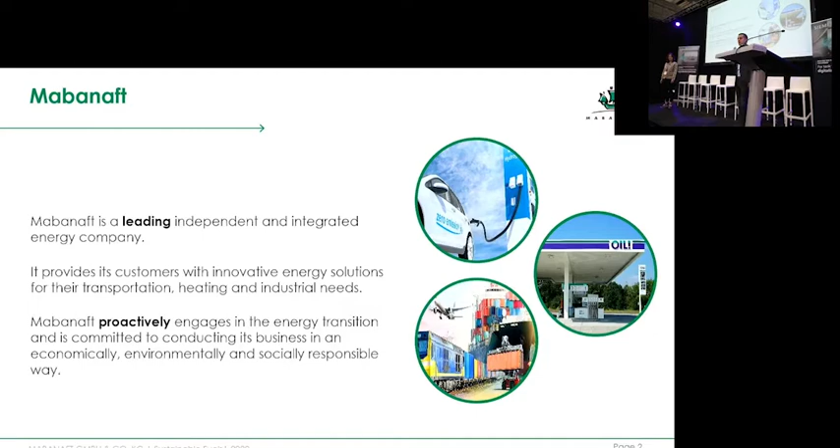Maybe to say a few words about Mabanaft for those who don't know us. We are also part of Marquard and Bahls Group and a leading independent integrated energy company. Our main business is providing energy solutions to our customers. So we are an energy supplier as we see ourselves, currently mostly liquid energy, but in future it of course can change. And we also decided that we want to proactively engage in the energy transition and to contribute to this and help our customers to move to a cleaner new world faster.

A few numbers: we are around about 1,000 employees, over 600 service stations, mostly in Northwest Europe, 18 million tons of sale volumes. And as you can see, our logo is green. It has always been green, even before it became popular. And now, of course, we need to also adjust our business to fit this nice green color. But I think we are on a good way to do so.

One of our areas of activities is called New Energy, Chemicals and Gas. Here we focus a lot on sustainable fuels. I will explain it a little bit more in a second, but also chemicals is part of our portfolio. We are constructing one of the largest ammonia plants in the United States right now, where Oiltanking slash Advario is also part of this project and is building the largest ammonia tank there to store this product. And finally, gas is also part of this new energy business where we trade LPG and bring it to our customers.

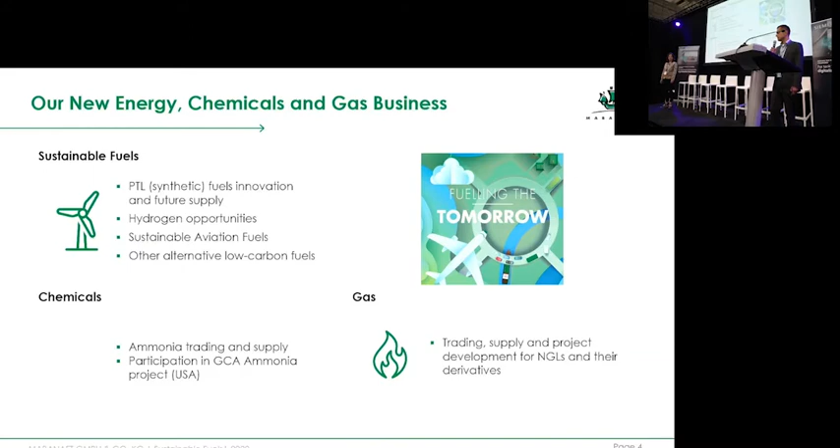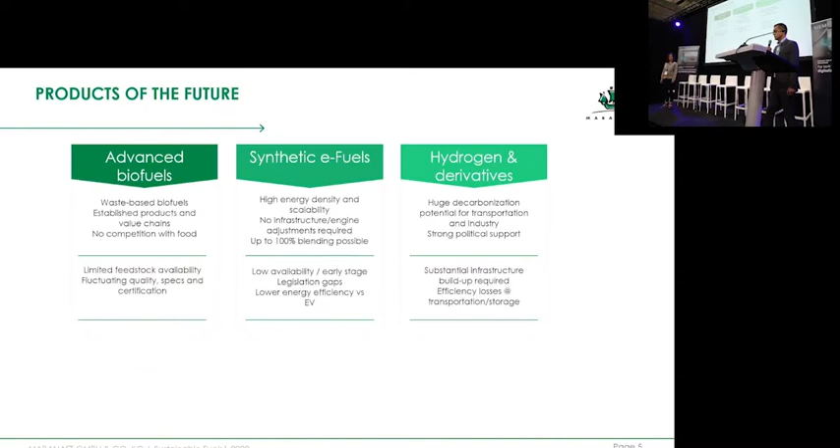So as we see, the future is not only about hydrogen. Of course, hydrogen will have a huge impact on energy transition and will be a key for the long-term energy transition. But apart from hydrogen, we also see a lot of future and potential for liquid products as well. And that is good news because the entire infrastructure we all have now can be used in future as well for advanced biofuels, waste-based biofuels basically, and synthetic fuels produced or derived from hydrogen.

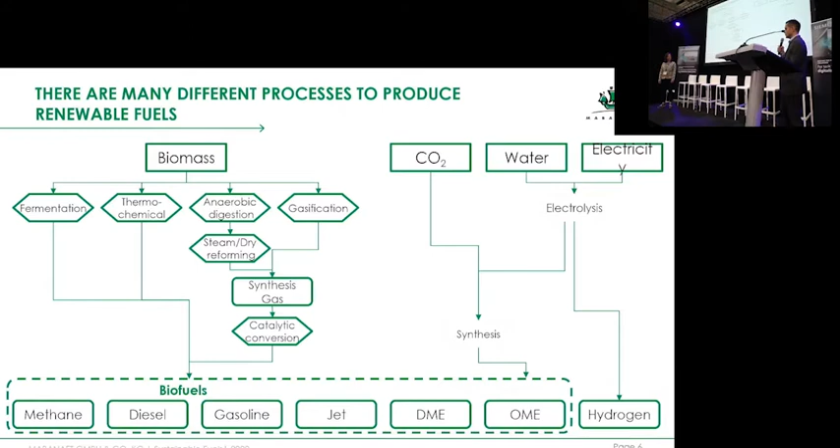You can get to the same products we have today from fossil fuels through different pathways. You can use biomass and ideally waste biomass to get to diesel, jet fuel, gasoline, whatever you require, even feedstocks for the chemical industry. But you can also produce your hydrogen through an electrolysis process and then either use hydrogen directly or go to the synthesis process where you combine hydrogen with CO2 and in this way also get to these liquid or gaseous products. So more or less the same molecules but produced in a green way.

We focus a lot now on e-fuels, the synthetic fuels, because we see these huge advantages of these products. They have more or less the same chemical composition as the products we already now use and know. The entire import or handling infrastructure can be used without any adjustments or changes. Also, our customers don't need to change anything on their cars or engines. They can just use synthetic fuels instead of fossil ones.

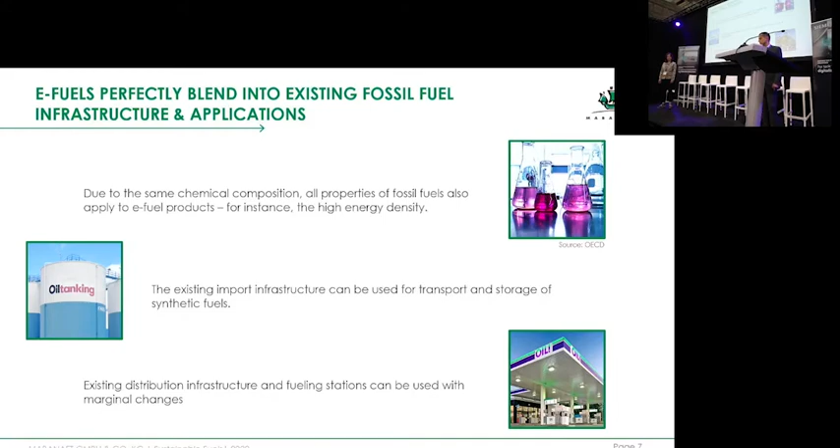And of course, they have a very high energy density. It's a liquid material. You can transport it better. You can store it more efficiently. And of course, you can bring it all the way to their customers and consumers, at the service stations, without any modifications required.

For that, we have different projects and initiatives. One of the largest initiatives is our joint venture P2X Europe with our partner, another German company, Hansen and Rosenthal. And one of the key areas of activities is development of our own synthetic fuels production. We are now planning a plant in Iberia to produce synthetic jet.

But first of all, we are, as we speak, taking into operation a small demonstration plant in Hamburg. It will be producing synthetic diesel, hopefully in the next weeks already. And we hope to bring this product to the market this year. And the purpose of this small project is to demonstrate that the production and utilization of these synthetic fuels is absolutely realistic and possible.

Our partner already operates a green electrolyzer in Hamburg for the last 3-4 years. It's around 5 megawatt of electrolyzer capacity, and now we're adding a small synthetic plant to that to combine green hydrogen with CO2 from biogenic source and produce synthetic products such as diesel, naphtha, and waxes. So yeah, we hope to showcase e-fuels very, very soon, as probably the first mover in Germany at least, maybe in Europe, being able to offer it in the market basically in a commercial way.

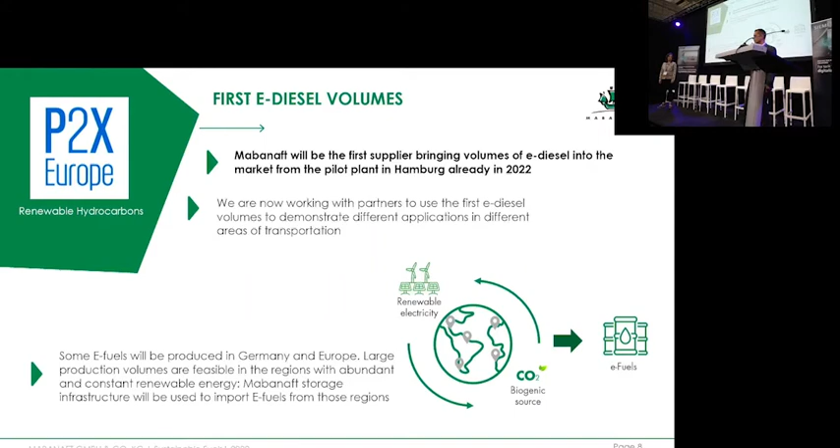A very small volume, of course, but still it's important because we still lack a lot of legislation, we still lack a lot of clarity around how these products will be handled, how they will be, for instance, applied to the CO2 obligations we have as a marketer of fuels in Germany. So we hope to push a little bit the politicians to create this clarity finally.

Well, moving on to hydrogen, we also see a lot of potential, of course, and this is a bit farther away from our current capabilities, but we believe that Mabanaft is also very well positioned to play a role here. And we all know that there is a huge potential for hydrogen. There are different forecasts, as we have seen today and during the first day of this event. And there will be importers and exporters. So, of course, there are regions where hydrogen, or particularly green hydrogen, can be produced in a more efficient way. Here, I just listed a few examples.

Also, there will be regions where production of green hydrogen is not so efficient. I think in Northern Europe, particularly in Germany, or let's say Scandinavia, maybe is a bit different story, but here in the Netherlands or in Germany, it is more efficient, of course, to use green energy produced here directly. But the green energy demand will be so huge that you will also need to import it from the regions where you can make it more efficiently, and maybe where otherwise this potential for green energy will be underutilized. And this can be done in form of hydrogen or e-fuels or other materials, but one way or another it will need to be imported, and then the corresponding infrastructure will be required.

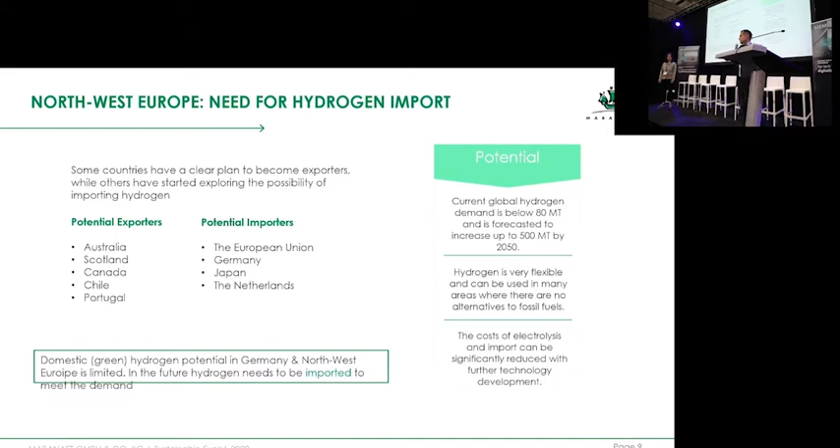How exactly you do this, how you transport hydrogen? The answer is simple. It depends, right? It depends. We are doing now a study with Technical University of Hamburg. We are taking part in different hydrogen initiatives, and everyone is looking into this, of course. And what we find out, I think, is that different ways and modes of transportation will be required and will be used, and it will depend a lot on how far you need to transport hydrogen. It will depend a lot on what is the final requirement. Do you want to use it as a liquid hydrogen, as a gaseous hydrogen? Do you want to use it as ammonia or methanol? The entire value chain needs to be analyzed, and then the decision has to be taken.

I will show you a little bit more detailed comparison of these different ways to transport hydrogen in a bit. But I think over long distance you will use, of course, pipelines or ships, and on a shorter distance, distributed locally, you will need some trucks or maybe railway to transport it, but it's of course much less efficient and will mean more losses during the transportation. But I think this is the main challenge all of us are facing now, to understand this better.

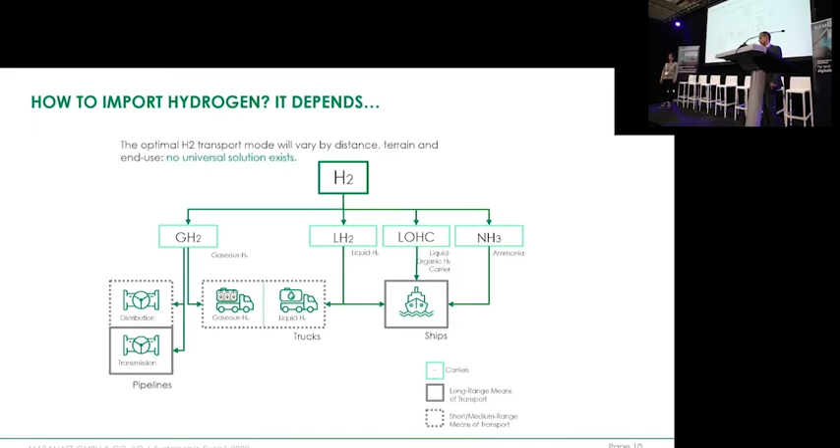Before I show a short comparison of all these different methods to store and transport hydrogen, just a few words on what Mabanaft is doing. We are a founding member of Aquaventus. It's a large initiative in Germany to install 10 gigawatts of wind energy offshore and to produce hydrogen also offshore on the platforms. I think it's still a nice idea with a lot of large companies involved, but it's rather a long-term development. Then we are also taking part in H2Dezentral. It's an initiative of the German Energy Agency looking into decentralized utilization of hydrogen.

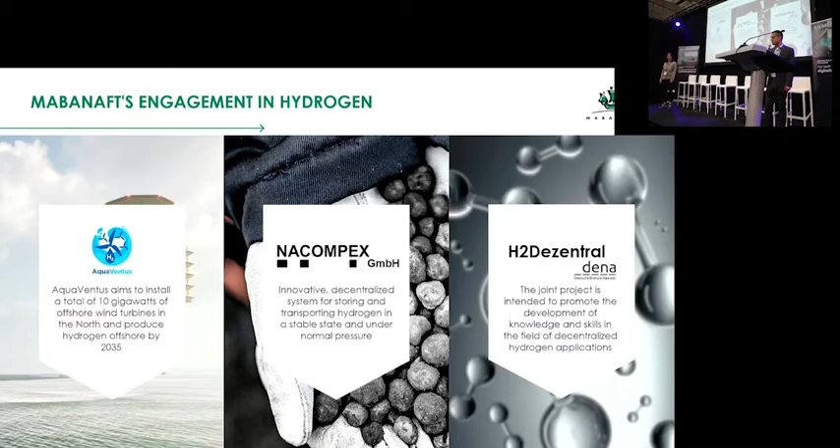And we also have some interesting local projects all around Germany looking into different opportunities to maybe locally produce or store and use hydrogen. And finally, and this is why Claudia Hain is also here, Nacompex, it's our investment where a new hydrogen storage technology, or not so new actually, but Claudia will explain, an interesting option to store and transport hydrogen is being developed.

And before I hand over to Claudia, maybe a few words on different options to store hydrogen. Of course, you've heard about all of them, and as you see, all of them have a lot of pros, but even more cons. So you will need to compare very carefully what is the best option for you, but I believe that all of them will be used because there are so many applications. Hydrogen is so flexible in its utilization that all these forms will be used one way or another.

So just to run very briefly through them, gaseous hydrogen is of course very pure and the mainly required product. You don't need a lot of energy for compression as in case of other materials, but on the other hand, it's a very low volumetric energy density and transportation over long distances has not been tested much yet, and a lot of investment for construction of this infrastructure will be required.

Liquid hydrogen has, on the contrary, very high volumetric density, but on the other hand, you will need a lot of energy to liquefy. There are boil-off effects while you transport or store it. And again, there are no large transport vessels available yet.

Another interesting option is LOHC. It's easy handling, of course. You can store it in normal tanks. It's not explosive or dangerous in that regard, but it requires a lot of energy for dehydrogenation. And again, there are no industrial scale facilities. We see some potential troubles with purification of hydrogen after you reconvert it back from LOHC. But on the other hand, there are some ideas to use LOHC directly as a fuel in engines, and then it might be an interesting option.

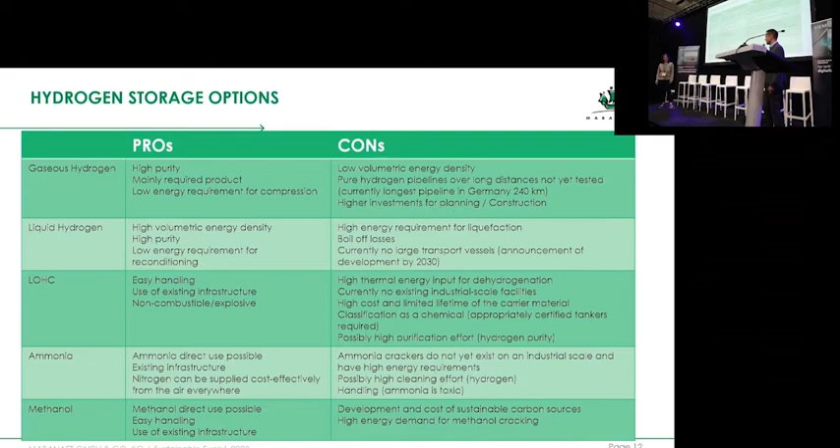My name is Claudia Hain. I'm the CEO of Nacompex GmbH, and we're dedicated to storing renewable energies, which for us is electricity from solar or wind power mainly. I'm really glad to present to you our patented Feredox technology, which is a storing option for hydrogen as well as energy in general and electricity.

Thanks to Oleksandr, we're really glad that Mabanaft is our investor and pioneers very much the energy transition in the oil sector. And I think this is the right time and the right opportunity to set it in reality, that we will find alternatives to fossil fuels in future.

So our approach to storing energy is chemical energy storage. As we already learned from Catherine, today there is a huge storage demand in the energy economy. And this asks not only for underground bulk storage, but also for overground storage. And our Feredox technology is dedicated to this storage task.

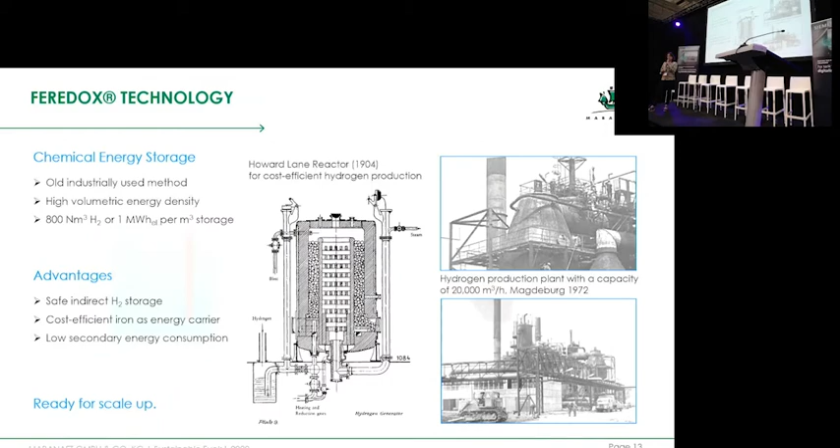So basically you have an indirect hydrogen storage. That means via a reversible redox reaction, the hydrogen is kind of consumed, its chemical energy is stored, and then later on from the iron carrier material you can release hydrogen again when you need it. So this is the core process, and I want now to introduce you to the process scheme.

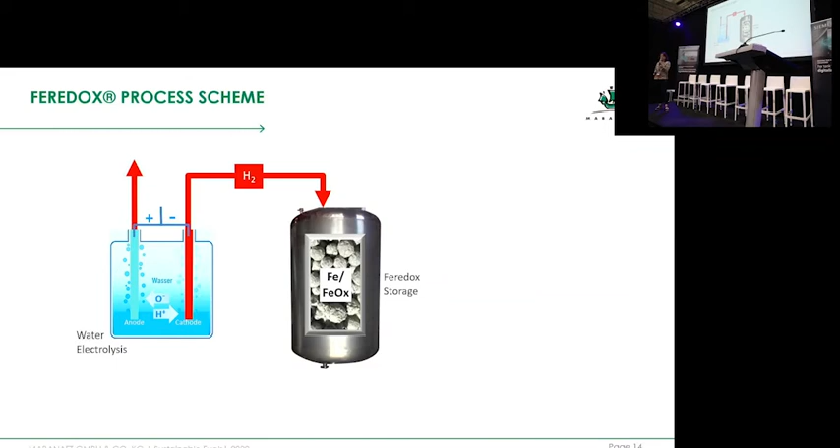So basically, you see the storage itself in the middle, and it works together with the water electrolyzer, which is, of course, the component in the systems to transform electrical energy into hydrogen. And we want to load the storage by producing hydrogen, going with the hydrogen stream to our iron mass bed. And the hydrogen will take from the iron oxide the oxygen component, producing steam that can be condensed and then as water led back to another cycle of the electrolyzer.

If you could apply a high temperature electrolyzer, then you could also directly use the steam from the storage loading process in order to perform the next cycle of steam electrolyzers. That leads to a very high efficiency because you won't have any emissions from that. The oxygen component is liquefied and stored later for the unloading of the storage. So this is basically the loading.

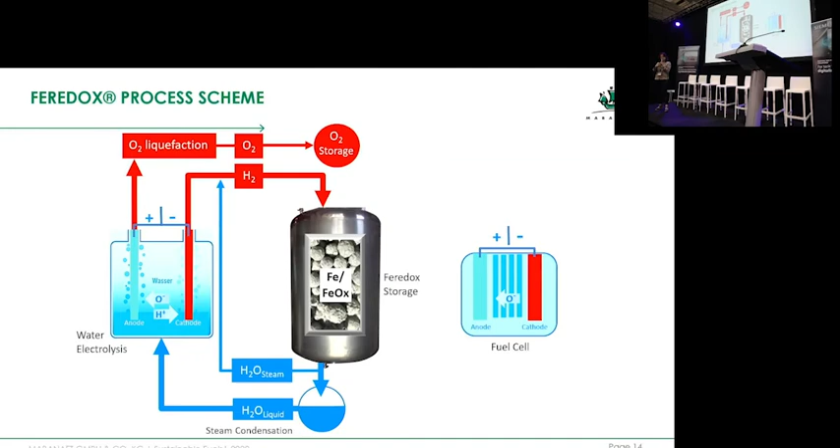The unloading would work, for example, this is dedicated to produce electrical energy in the end via a fuel cell. The fuel cell is driven by hydrogen steam mixture that comes out of the storage while unloading. And it is burned within the fuel cell together with the stored oxygen, and it forms steam again that is led back to the reactor to perform another unloading cycle. In this way, you would have a very good input power to output power ratio, which makes it very suitable for electricity storage.

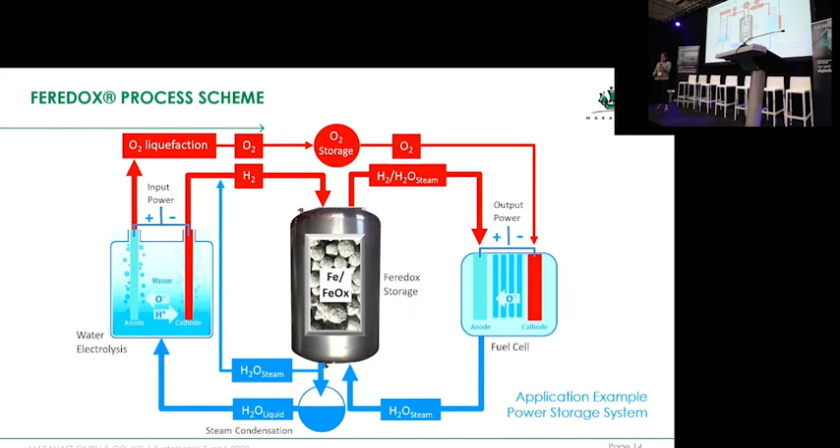But of course, you could also use this as hydrogen storage. If you just take off the hydrogen from the right-hand side and take fresh water from the left side for loading, you could also use it for chemical storage. This basically is the concept of the Feredox technology, and due to its closed cycle without emission, it leads to very high overall efficiencies, especially with high temperature electrolyzers and fuel cells.

But the process can be seen in various applications, which I collected for you, which is in the first bulk hydrogen storage. You would have no pressurized tanks needed for it, so you have only a low heating energy consumption of the storage process, and you can take out 100% of the hydrogen stored before.

That can be applied to transport tasks as well as local storage in production processes, and of course the purity of the hydrogen is very good, so this might be used in the future for chemical production to form a new basis chemical.

You can also use it, as shown in the process scheme, for decentral electricity storage, which is as well needed in the energy economy. And last but not least, the process, as patented, is also suitable to transform CO2 into CO via the unloading cycle.

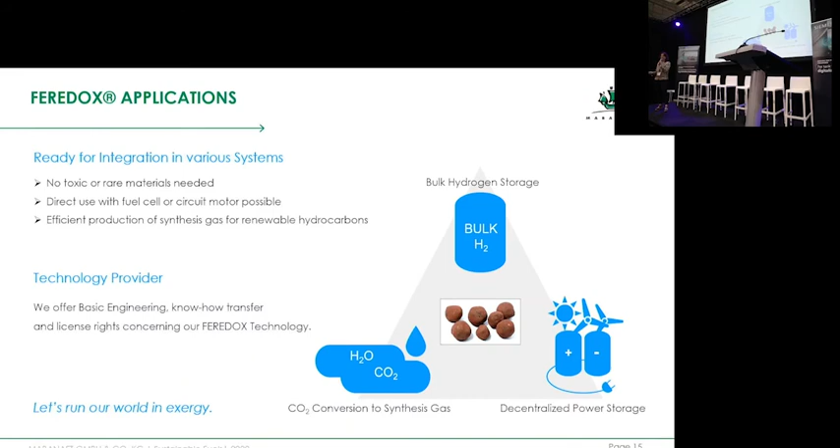Thank you. And if you have any questions, I can tell you. I think I have one more slide to finalize.

So you will need ammonia storage, you will need hydrogen storage, you will need conversion capabilities, and of course entirely new distribution infrastructure as well. On the other hand, for biofuels and synthetic fuels, we see the requirement for smaller segregated tanks, because there will be different qualities of these products, particularly on the advanced biofuels side. You will see different products, different qualities, different certifications which you will want to store separately and segregate. So we will need more flexibility definitely on the storage side.

And also specific blends will be required for different customers and applications. Again, you will need probably smaller tanks to accommodate this requirement. And for the synthetic fuels, the advantage is they're a bit more uniform, a bit more homogeneous, so they're very similar to fossil fuels. In that regard, you can use the same tanks. On the other hand, initially they will not be used as pure fuel because of the cost, I guess. But with the scaling up and the cost decrease, I think they will take over and they will replace the currently existing fossil fuels.